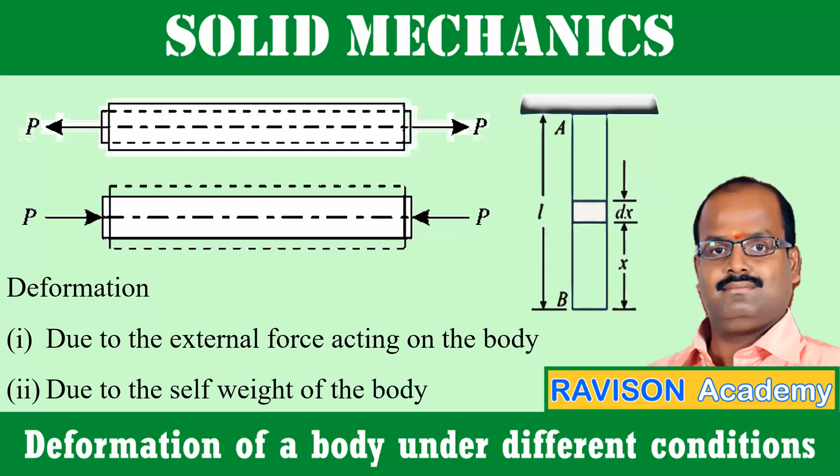In this video, we are going to see about the deformation due to the external force acting on the body and deformation due to the self-weight of the body. To know about the deformation, we should know about stress, strain and Young's modulus and the mass density and weight density of the material.

What is stress? Both stress and strength are interrelated. Strength is the measure of the amount of the stress a material can withstand without breaking. It is the ability of the material to absorb the maximum load before it breaks. So consider an elastic material. So when you stretch, what happens?

It elongates in the linear direction and also in the lateral direction. So the length is elongated and the diameter is reduced. So at one particular time, the neck is forming where the maximum stress is applied. So once the neck is formed, the object is about to fail. So finally, the fracture will happen.

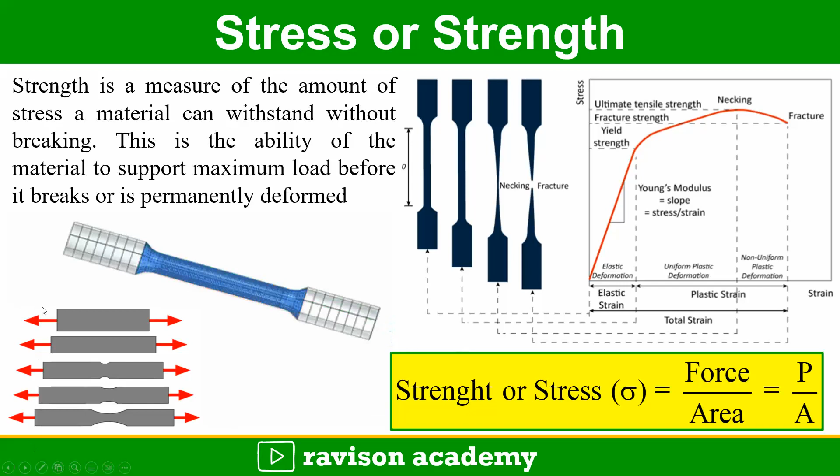So the stress is the internal resistance offered by the body against externally applied forces. So stress is force per unit area. The unit is Newton per meter square. Strain is the deformation of material from the stress. It is the ratio of change in dimension to the original dimension.

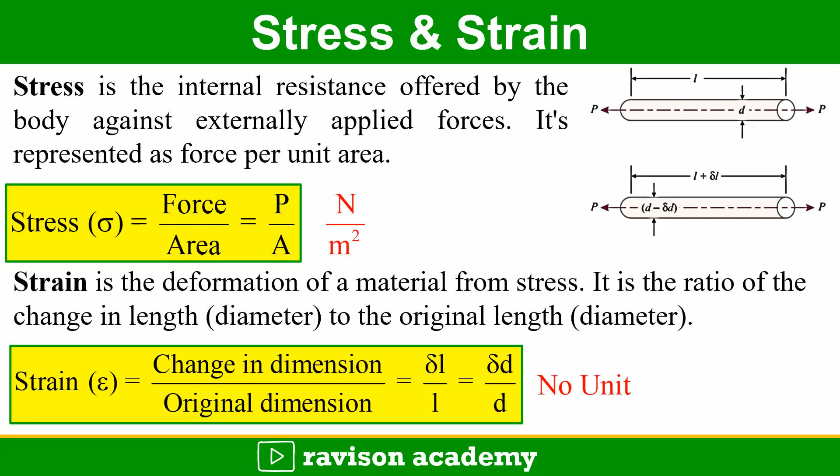Suppose if you take longitudinal side, you can tell change in length by original length. If I take lateral side, you can tell change in diameter by original diameter. Strain has no unit. The Hooke's law states that within the elastic limit, the extension is proportional to the force.

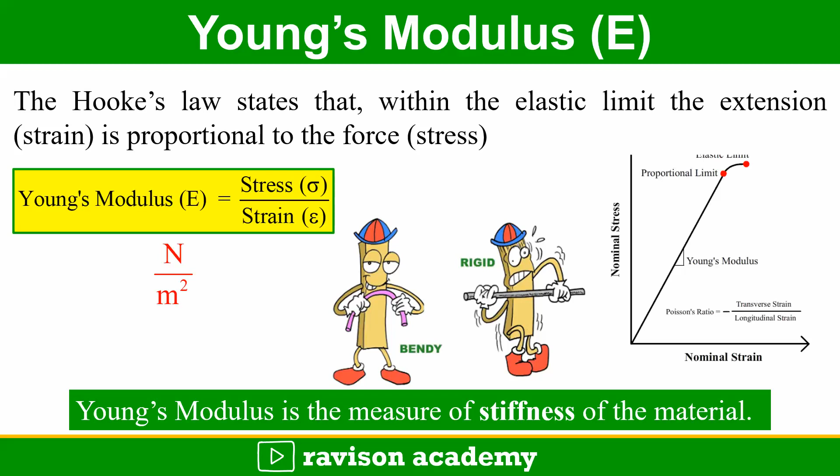So the Young's modulus is the ratio of stress to the strain. The unit of Young's modulus is Newton per meter square. So the Young's modulus is the measure of the stiffness of the material. When the Young's modulus is very low, the material is very flexible. When the Young's modulus is very high, the material is rigid.

Mass density or density. So the density is the property which describes the compactness of the substance. If the substance is very compact, we can tell it is a high density. If it is less compact, we can tell it is a low density. So mathematically, we can tell the density is the mass per unit volume. The SI unit is kg per meter cube.

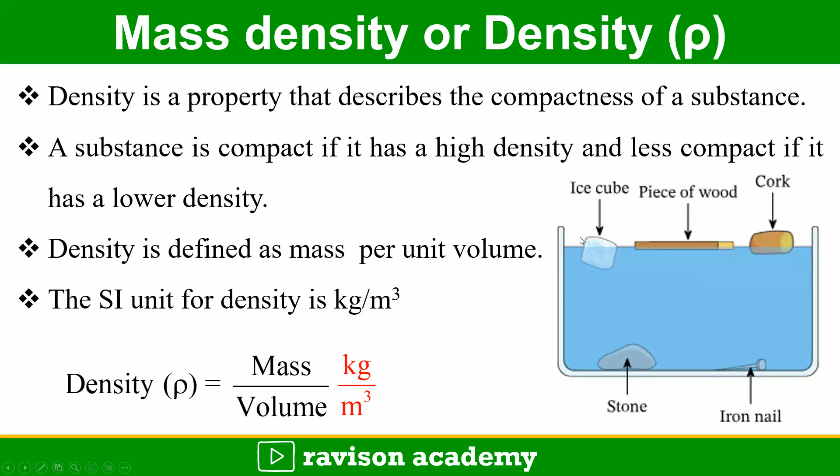So here in the water, the wood floats on the water. Similarly, cork floats on the water and the ice cube floats on the water. But the stone and the iron nail sink in the water. It shows that whenever the object has the lesser density it floats, and with the higher density it sinks.

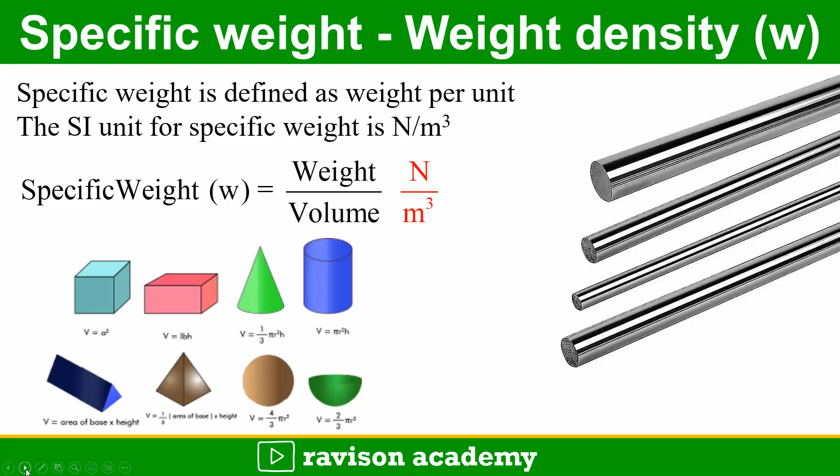Specific weight or weight density. The specific weight is defined as the weight per unit volume. So the unit is Newton per meter cube. So deformation. So what is this deformation? When you apply the force axially, either it may be a compressive force or it may be a tensile force. What happens? The body will elongate or contract. This elongation and contraction is said to be deformation.

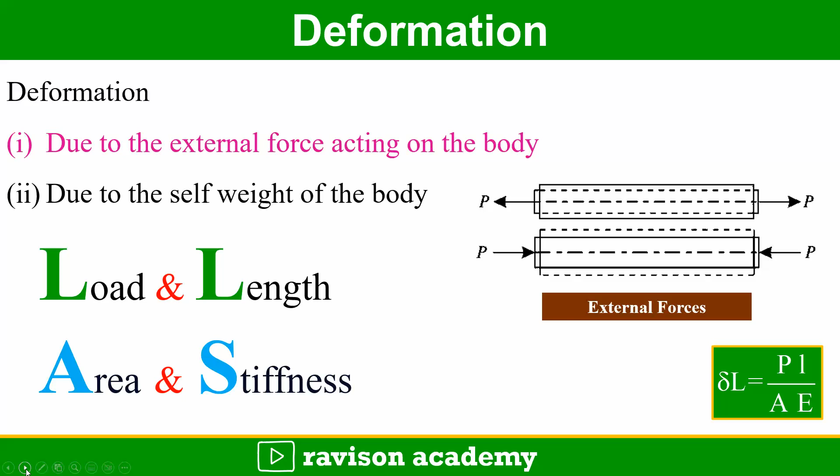So this deformation depends upon load acting on the body and the length of the body, similarly the cross-sectional area of the body and also the stiffness of the material. Similarly, when considering the deformation of the body due to the self weight, when the body is hanging freely or suspended freely, the weight of the body will be acting as the load and the length of the body comes into account. Similarly, the area and stiffness also come into play.

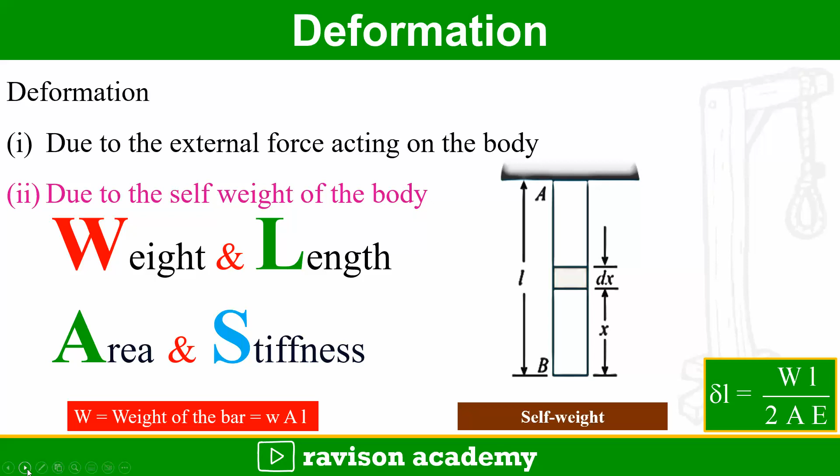So coming to the deformation due to the external forces, let P be the tensile force acting on the body. It is the axial force. So del L. So once the tensile force acts, what happens? The deformation in the length will happen. It is positive. In the lateral dimension, negative deformation will happen. That is, the diameter will be reduced.

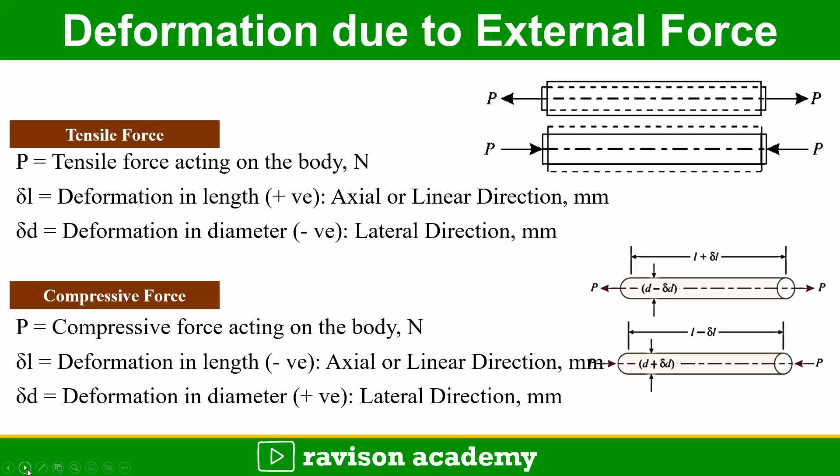Similarly, take the opposite case, when it is a compressive force, what happens? The length will be reduced. We can tell it is a negative deformation and the diameter is increased. We can tell in the lateral side it has the positive deformation. So considering the tensile force P, to arrive at the relation of deformation of the body due to the external force, initially before the application of the force, the length of the bar is L, taken in mm, and diameter of the bar is taken.

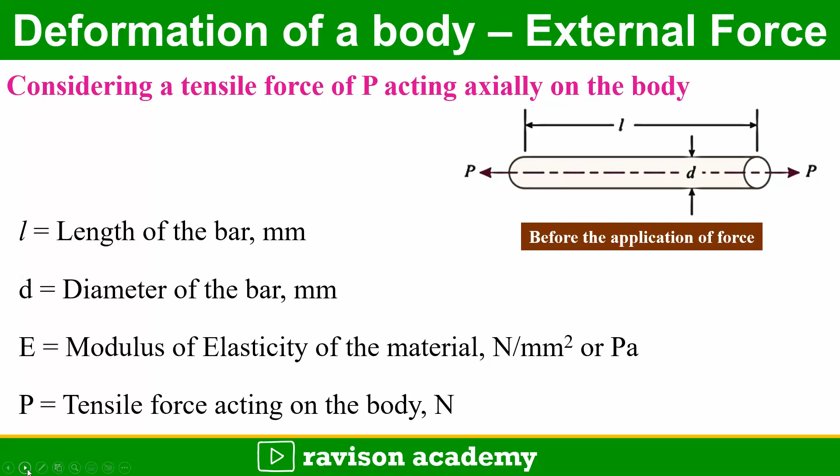Similarly, E, the Young's modulus of the material is taken, that is the stiffness of the material, and the tensile force acting on the body is taken. After the application of force, the stress is induced in the body. Due to the stress, strain is created and the deformation is going to happen.

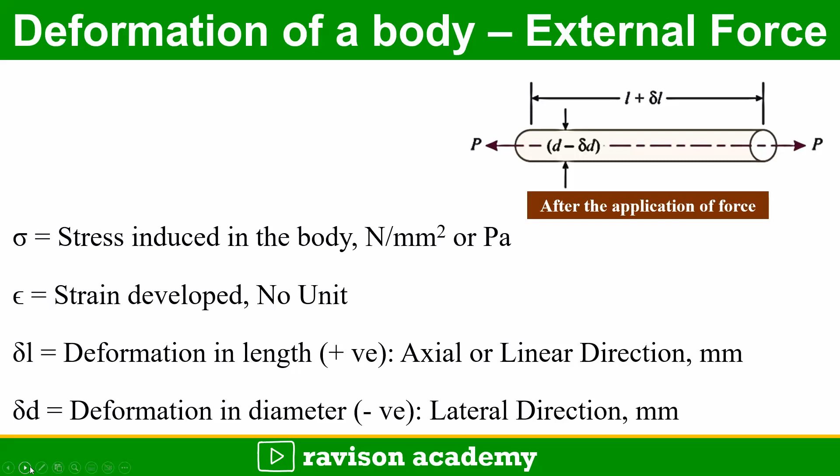So stress has the unit Newton per millimeter square, and strain, since it is a ratio, has no unit. The change in length is on the positive side, since it is a case of a tensile force. Similarly, the diameter, the lateral dimension, reduces, so you can take it as negative. So the unit is mm.

So you know the equations. Stress, represented by sigma, is force per unit area. Strain is the change in dimension to the original dimension. Young's modulus is stress by strain. So you know the equation of stress. Stress is load by area and strain is change in length by original length.

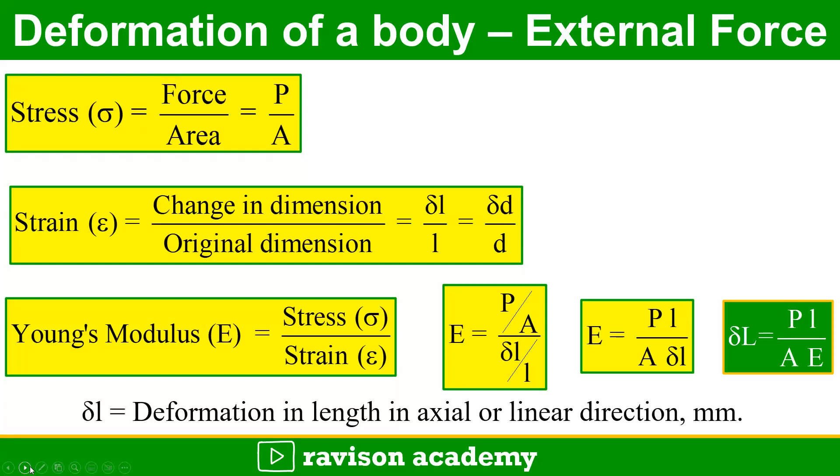So now substituting in the equation of the Young's modulus, you can get P by A divided by del L by L. So you will finally get the equation E is equal to PL by A into del L. So taking del L, you can get the del L equation as PL by AE, where del L is the deformation in the axial length.

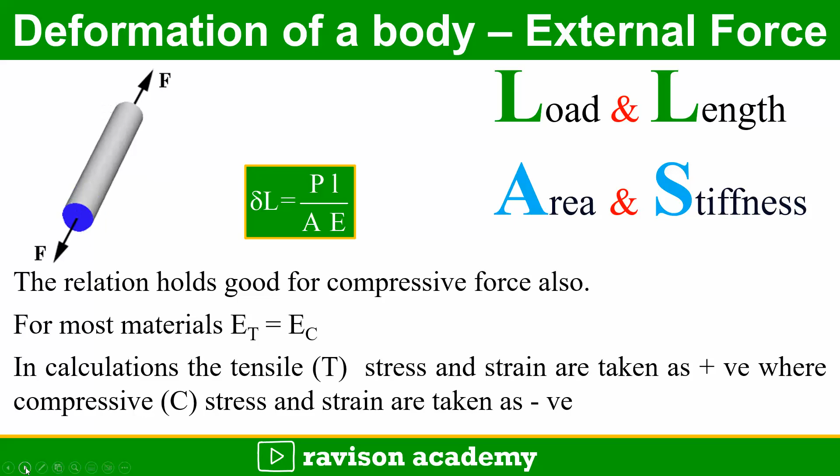So coming to the deformation, this equation del L is equal to PL by AE is also applicable to the compressive force. Mostly in this case we have taken the example of the tensile load. We can apply the same thing to compressive loads also, where tensile stress is taken as positive, whereas compressive stress and strain are taken as negative.

Coming to the deformation of the body due to the self weight, or when the body is hanging freely, take this figure: a bar of length L is hanging freely. So the length of the bar is taken into account, the cross-sectional area is taken into account, and the Young's modulus E, that is the stiffness of the material. The weight of the material comes into play here. Since it is suspended freely, the object gets deformed due to its own weight.

So weight here is equal to small w into AL. Small w is nothing but the specific weight, A is the cross-sectional area of the material, and L is the length of the bar.

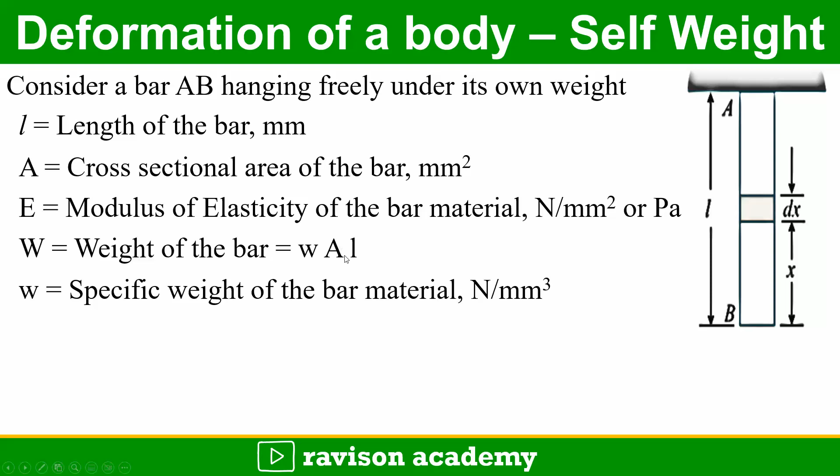So coming to the derivation, we can take a small section dx of the bar at a distance x from the bottom end. So the weight of the bar for the length of x, at which dx is situated: the load P is equal to specific weight into area into the distance. So the elongation of the small section of the bar due to the weight of the bar we can write as PL by AE, from the previous relation del L is equal to PL by AE.

Now I'm substituting the value of P. What is the value of P? P is equal to w, specific weight, into area into x, the length of the position, into the small element dx divided by AE. So the final equation we get is wx into dx by E.

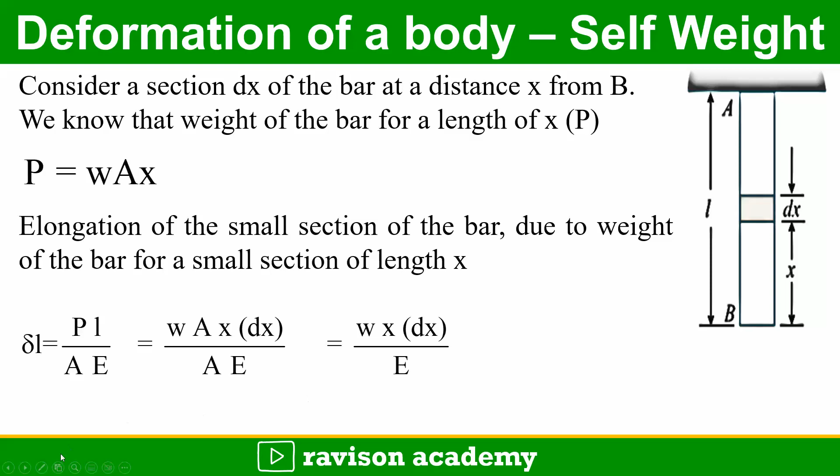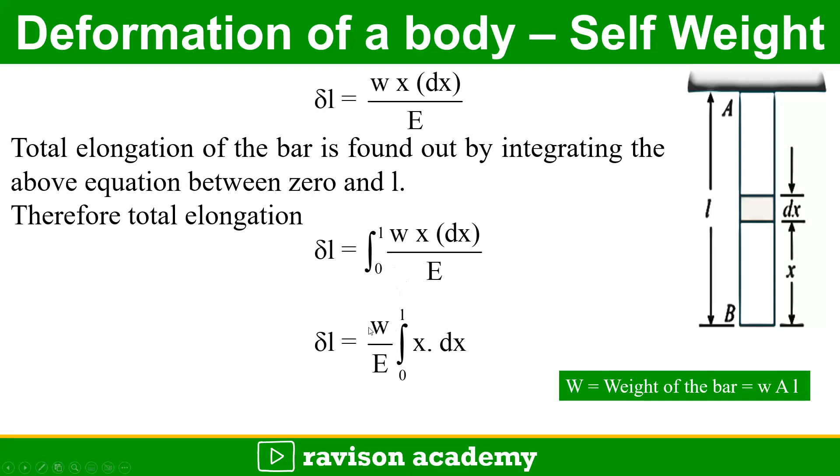So the total elongation of the bar we can find by integrating the above equation from 0 to L. So integrating from 0 to L of wx into dx by E, we take w by E as constant. Then we have 0 to L of x into dx. On integrating x dx, we get x squared by 2, with lower limit 0 and upper limit L. So finally you will get w into L squared by 2E.

So here you substitute the value of w. The value of w is capital W by AL, into L squared by 2E. So on reducing it, you get del L is equal to WL by 2AE. So the deformation of the bar due to its own weight is equal to half of the deformation if the same body is subjected to a direct load equal to the weight of the body.

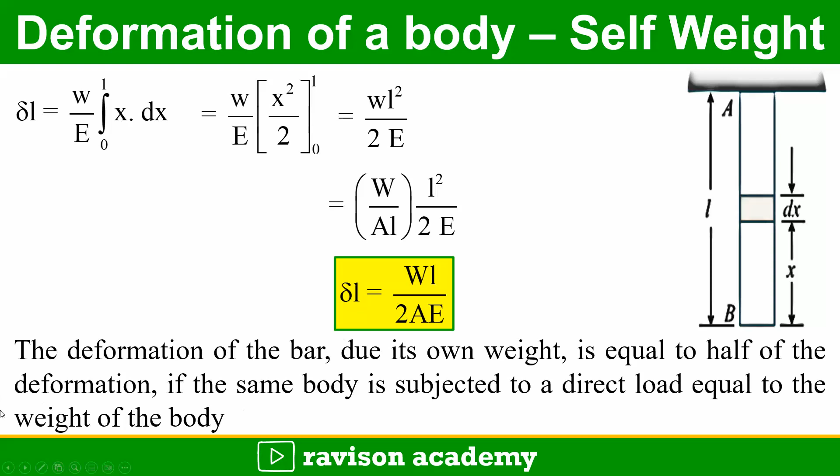So the equations to remember: stress is the ratio of force to area, strain is the ratio of change in dimension to the original dimension, Young's modulus is the ratio of stress to strain, and from the above equation we can derive strain is equal to stress divided by Young's modulus. And there are two main equations to remember: deformation of the body due to the external force, del L is equal to PL by AE. Similarly, due to its self weight, del L is equal to WL divided by 2AE.

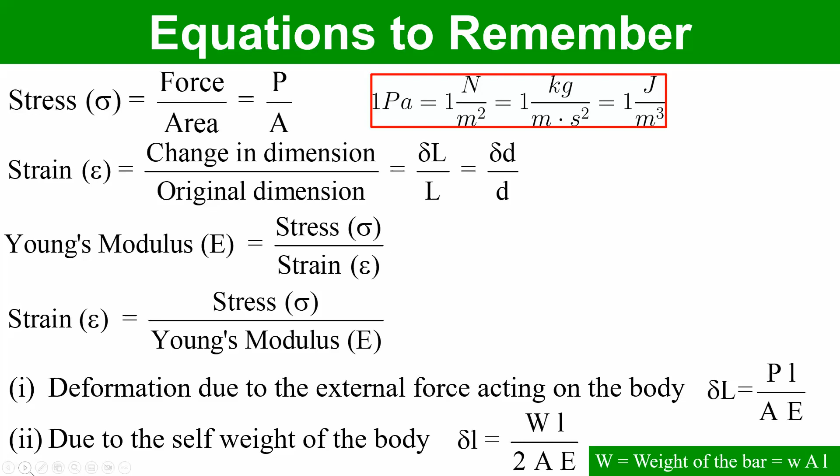So in this video, we have seen what is deformation, what is stress and strain, what is Young's modulus, how the value of Young's modulus is related with stiffness, what is mass density and weight density, and finally the two derivations: deformation of the body due to the external forces acting on the body and the deformation of the body due to its self weight.